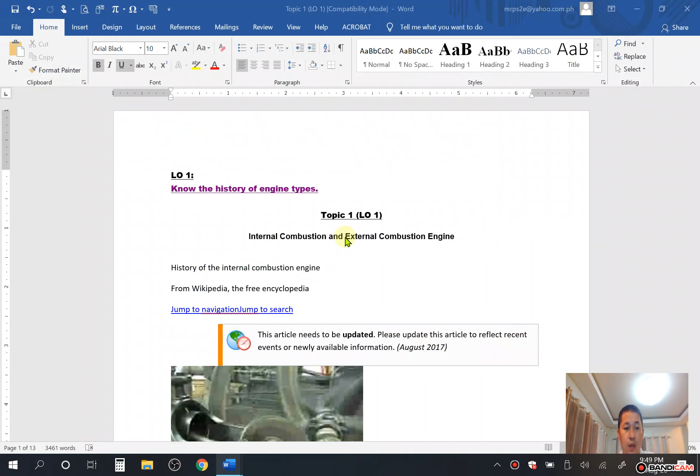So it's not highlighted here. So here I will highlight. So just, so in 1872, it's not showing. So I will click again. So the signal is very weak. It's not opening it. So now it's opening. So it's not highlighted. Okay. So here it's coming. This is pertaining to the history of internal combustion engine.

What happened to this? You are disturbing.

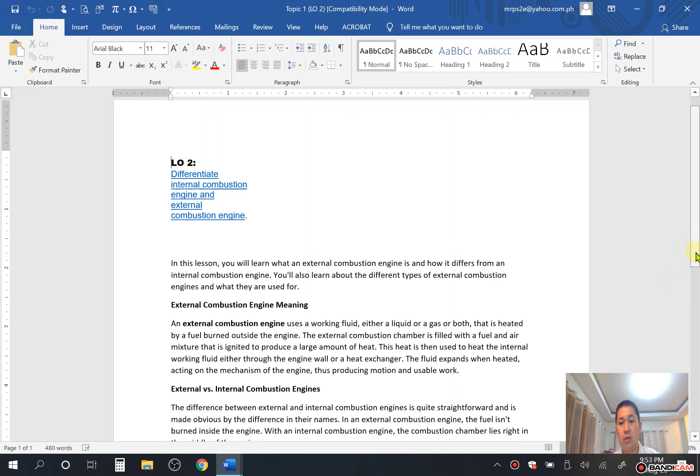So now, let us proceed to learning outcome number 2: differentiate internal combustion engine and external combustion engine. So I will click this link. So here, in this lesson, you will learn what an external combustion engine is and how it differs from the internal combustion engine. You will also learn about the different types of external combustion engines and what they are used for.

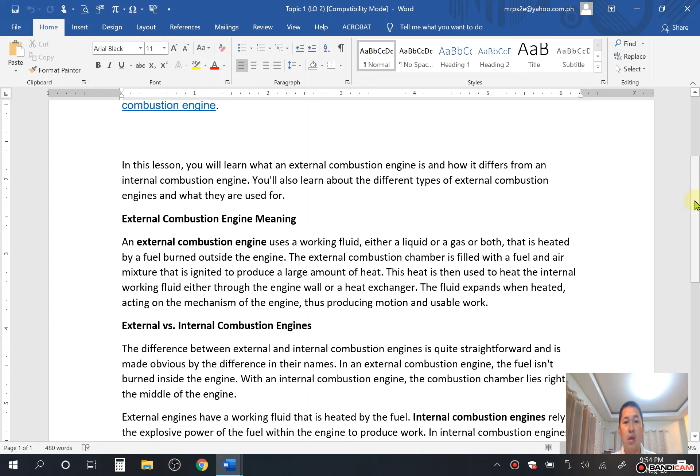The external combustion engine uses a working fluid, either a liquid or gas or both, that is heated by a fuel burned outside the engine. So external means outside. The external combustion chamber is filled with a fuel and air mixture that is ignited to produce a large amount of heat. This heat is then used to heat the internal working fluid, either through the engine wall or a heat exchanger. The fluid expands when heated, acting on the mechanism of the engine, thus producing motion and usable work.

So we will differentiate the two types of engine, which are external and internal. So external versus internal combustion engine. The difference between the external and internal combustion engines is quite straightforward and is made obvious by the difference in their names. So by the names themselves, external and internal, they are already different.

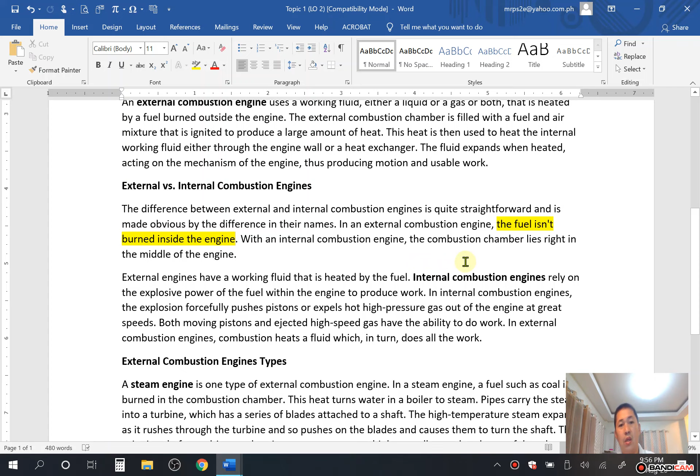So in an external combustion engine, the fuel isn't burned. So this is the keyword. Remember this. So in the external combustion engine, the fuel isn't burned inside the engine itself. With the internal combustion engine, the combustion chamber lies right in the middle of the engine. Later on, we will see an example of the external combustion engine. External engines have a working fluid that is heated by the fuel.

So here it comes. Internal combustion engines rely on the explosive power of the fuel within the engine to produce work. In internal combustion engines, the explosion forcefully pushes the piston or expels high pressure gas out of the engine at great speeds. Both the moving piston and the ejected high speed gas have the ability to do work. In external combustion engines, combustion heats fluids, which in turn do all the work.

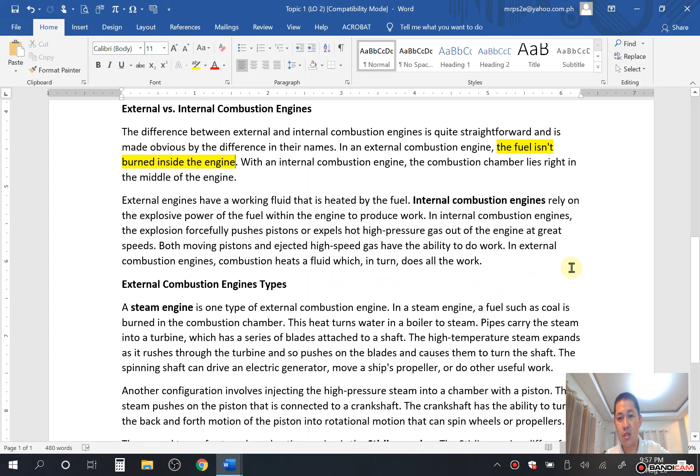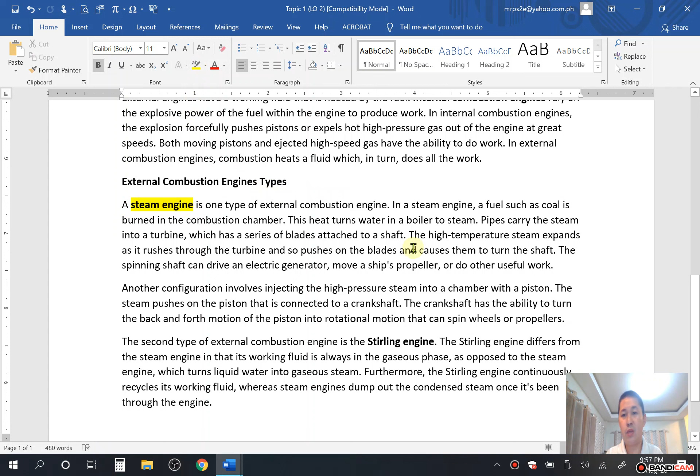So here we will give an example of an external combustion engine. One example is the steam engine. Later on, you can see the picture. So the steam engine is one type of external combustion engine. In a steam engine, a fuel such as coal is burned in the combustion chamber. The heat turns water in a boiler to steam.

So if you remember the movie Titanic, it is a true story. If you remember, the fuel used at that time was coal. So they used coal fuel in the boiler. So nowadays, so I will, excuse me, I will

So nowadays the fuel of the boiler is, so I will check here if there is a pen. So is it this pen? I cannot see where the pen is. So here, review. So here is the pen. So I can write now.

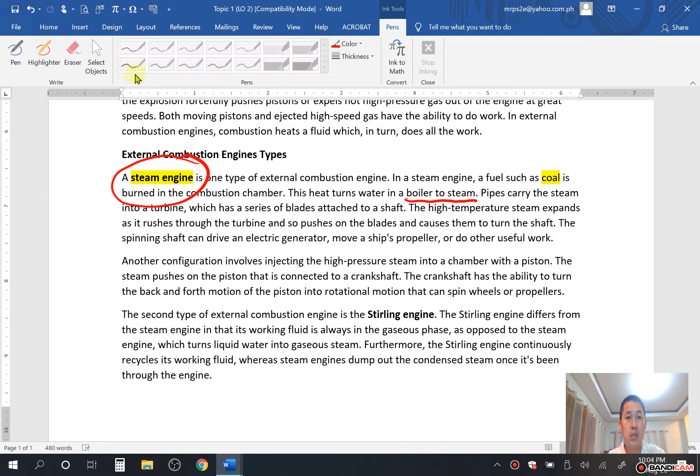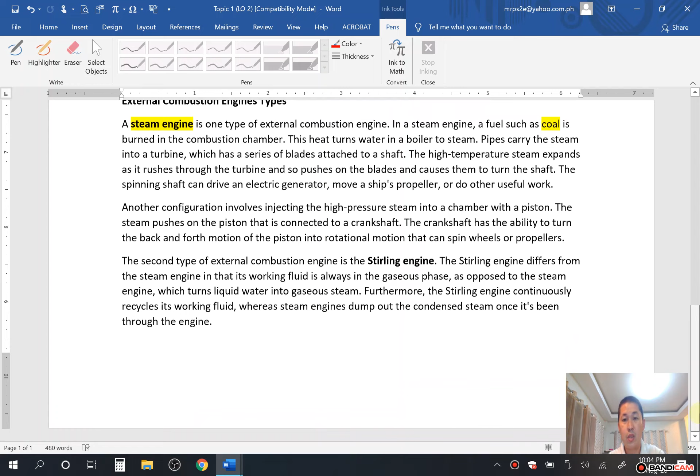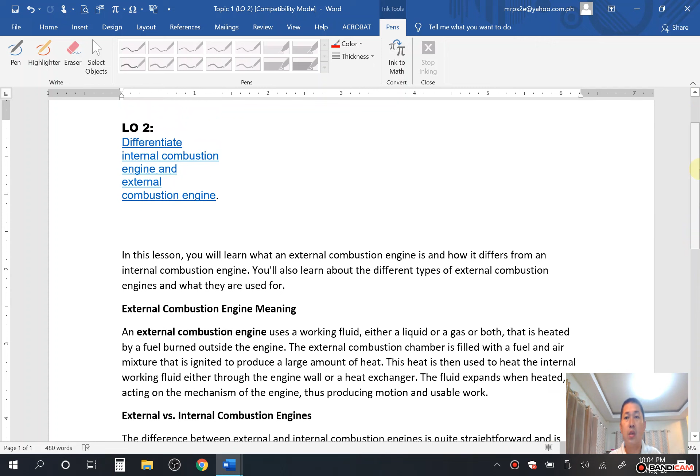So here, later on, we can see the, so I have to erase first. So later we can see the diagram as we go on with our discussion. So I will close this window.

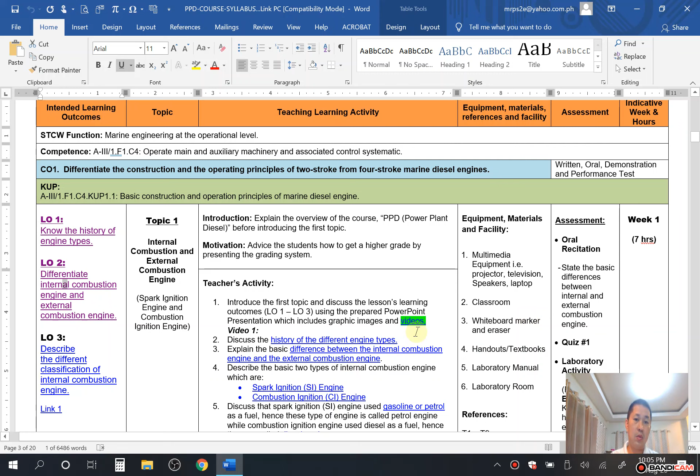So here we already differentiated the internal combustion engine and the external combustion engine. So we will describe the different classifications of internal combustion engine. So I will click this link. So it's not opening. Once again. So it's quite hard to open the link if the signal is not good.

So here we will talk about the classification of engine. So our example here is engine design and classification, how automotive engines are categorized. So this automotive engine is similar to the marine engine in principle, but the difference, for example, is cooling, because in the automotive engine the cooling system is a combination of the coolant, the cooling water, fresh water, and the air, through a radiator.

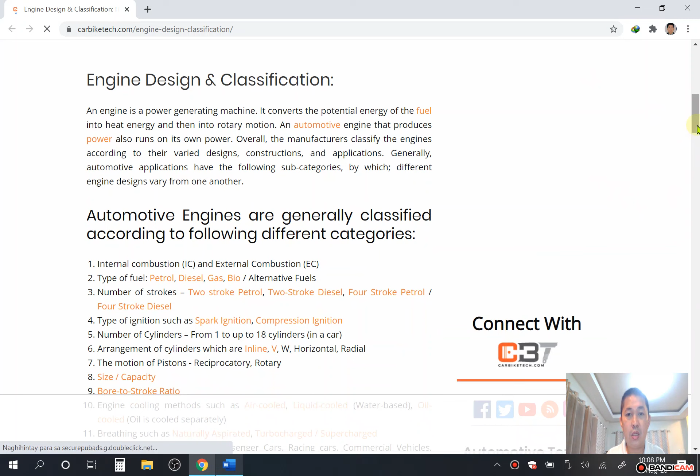But in the ship, there is a freshwater cooler, and the fresh water is being cooled by seawater, and the engine is being cooled by the fresh water. So now, engine design and classification. We can classify the engine generally according to the following categories. Number one, internal combustion, which is IC, and external combustion, which is EC.

Number 2 category, type of fuel. Internal and external combustion engines use petrol or gasoline, diesel fuel, gas fuel, and biofuel. Number 3, number of strokes. Internal combustion engines are classified by number of strokes: 2-stroke petrol engine, 2-stroke diesel engine, 4-stroke petrol engine, and 4-stroke diesel engine. Number 4, type of ignition, such as spark ignition and compression ignition.

They are also classified by the number of cylinders, from 1 up to 18 cylinders, depending on the design. Arrangement of cylinders: inline and V-type, also W type, horizontal type and radial type. The motion of pistons is either rotary or reciprocating. They are also categorized as naturally aspirated, turbocharged, or supercharged. So these are the classifications of engine.

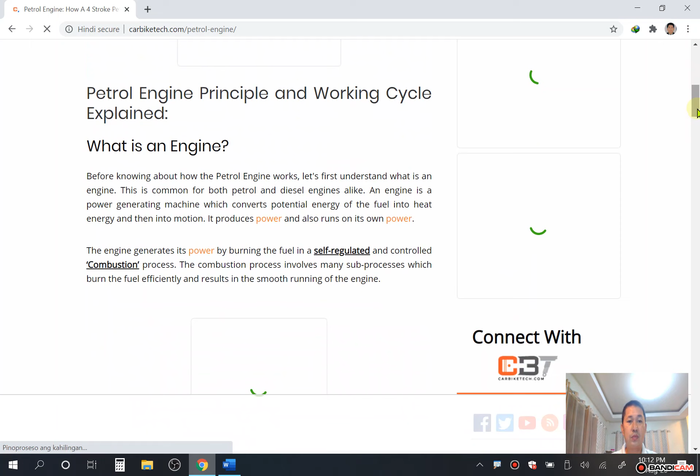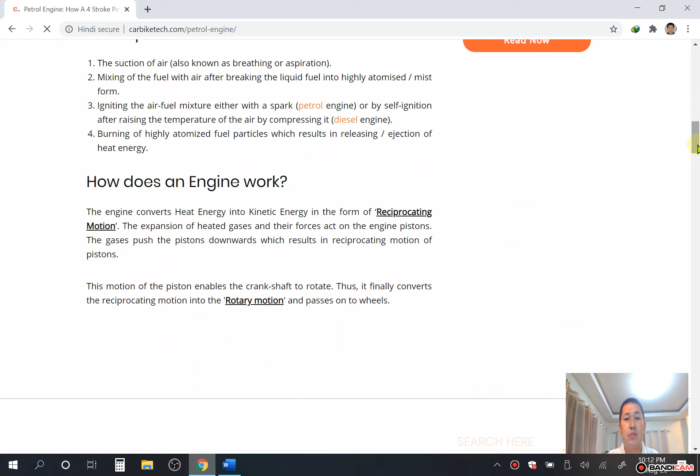So it's not opening it. Or maybe I can open my Word file. So here, it's not linked now. So we have to wait.

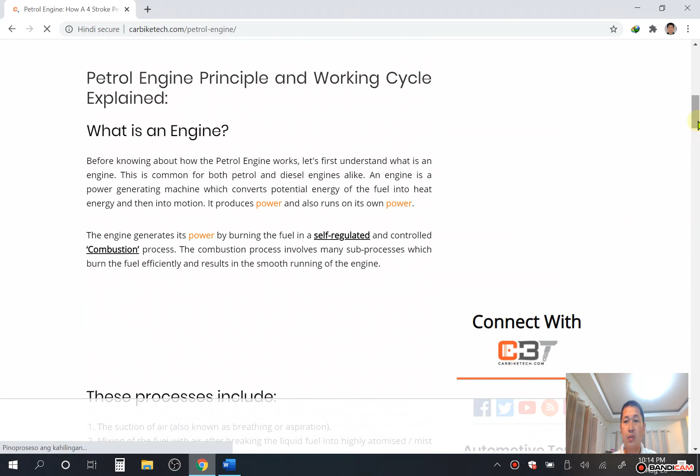So next, the Otto cycle is known as the four-stroke spark ignition cycle. It was named after German engineer Nikolaus Otto, who developed and patented the first four-stroke petrol engine. The four-stroke petrol engine works on the following cycle. Suction stroke with the piston moving downwards. So this is the piston. Piston moving downward.

And the opening of the intake valve or inlet valve. So the correct term is intake valve. So this one now is open. So the valve creates suction of the air-fuel mixture. So in the gasoline engine, when the piston is moving downward, the fuel and air is being sucked here. You see? So it's sucked into the cylinder.

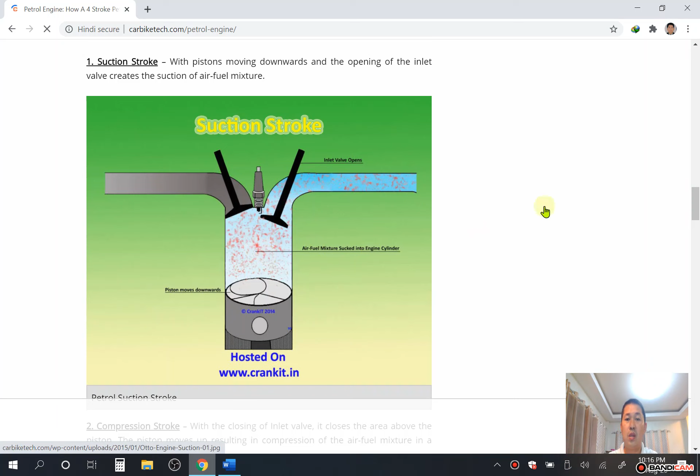So next stroke, compression stroke. So in the compression stroke, with the closing of the inlet valve, it closes the area above and the piston moves up, resulting in the compression of the air-fuel mixture in the confined space. So now you can see the intake valve is closed and the piston is moving upward. So here, this is the piston. So now a compression happens. So that is the compression stroke. So compression of air here together with the fuel mixture, because this is a gasoline engine.

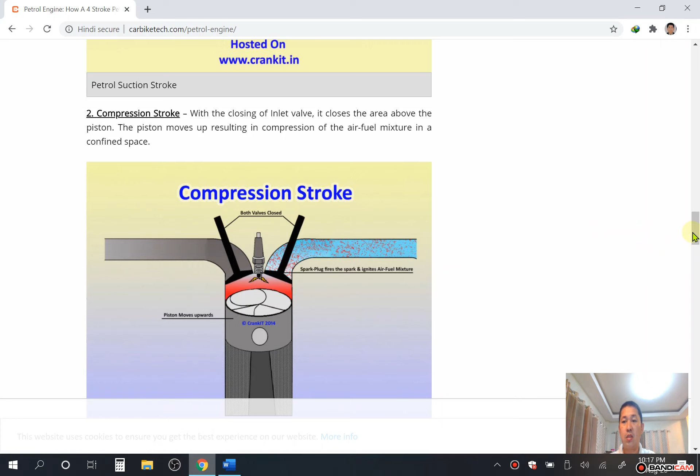So now followed by the spark. So this is a spark from the spark plug. So next stroke. So here there is a process, the combustion process. So at this stage the spark plug fires the sparks, resulting in instantaneous burning of petrol, causing an explosion. This causes heat to release, which generates expanding forces known as power. So here, as you can see on this drawing, there is a spark from the spark plug. So remember the keyword. If the question is SI engine, this belongs to the Otto cycle, which is using a spark plug. So this is a spark plug.

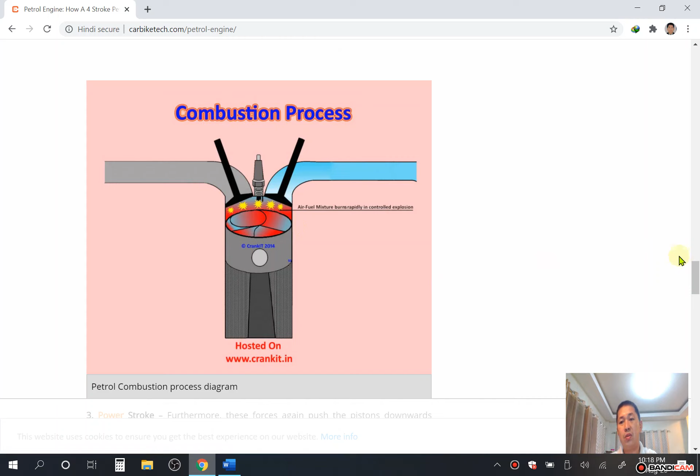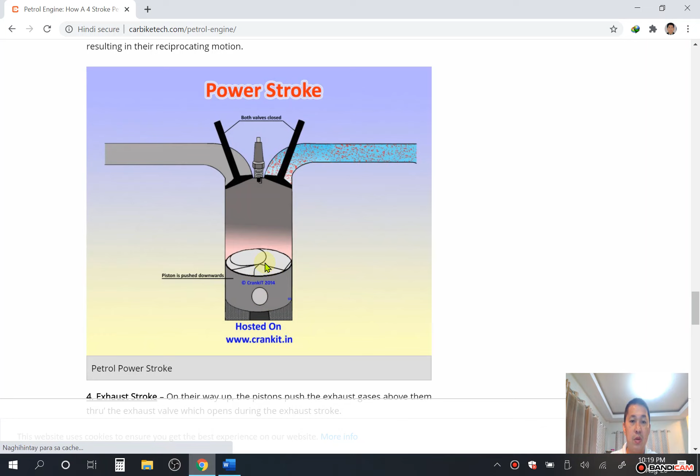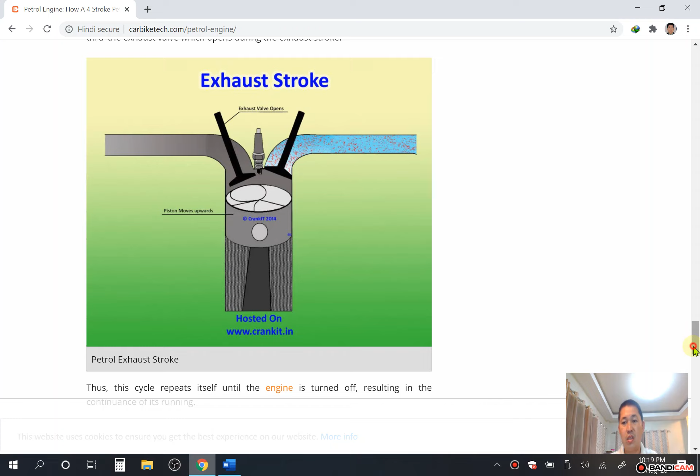Next. So now you can see here the combustion process. So there is a compression of the air and fuel mixture here, then followed by the spark plug. So there is combustion happening inside the cylinder. So now, as you can see, when the combustion happens, there are expanding gases in this area here. So when there is an expansion of gases inside the cylinder, the piston is pushed downward. So the piston is connected to the connecting rod, and the connecting rod is connected to the crankshaft. So the crankshaft cranks and continues turning. So that is the power stroke here.

So now after the power stroke, there is the so-called exhaust stroke. So now the exhaust valve is open. So as you can see here on the drawing, the exhaust valve is open. So the piston moving upward pushes the exhaust gases out, going to the atmosphere. So that is the explanation of the SI engine. So the SI engine, remember, there is a spark plug. The way this engine ignites is by the use of the electric spark from the spark plug. So next,

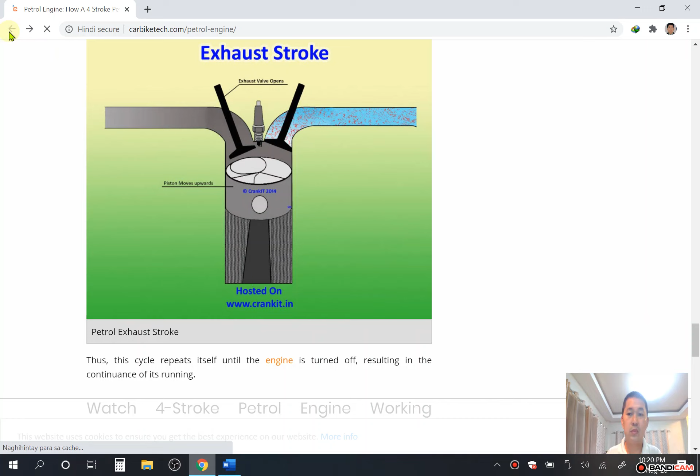So the signal is quite slow. So here we will proceed with the compression ignition engine. So, always loading.

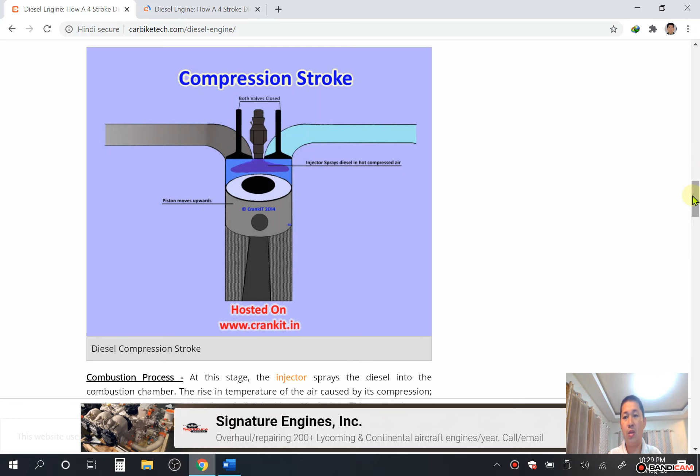So remember, the SI engine uses a spark plug to ignite the air and fuel, and the compression ignition engine, which is the CI engine, ignites the fuel and air inside the cylinder by heat of compression. So that is the difference between these two engines. So here let us go to the combustion process.

Combustion process. At this stage, the injector sprays the diesel into the combustion chamber. The rise in temperature of the air, so heat of compression, caused by its compression results in instantaneous burning of diesel with an explosion. This causes the heat release, which generates expanding forces known as power.

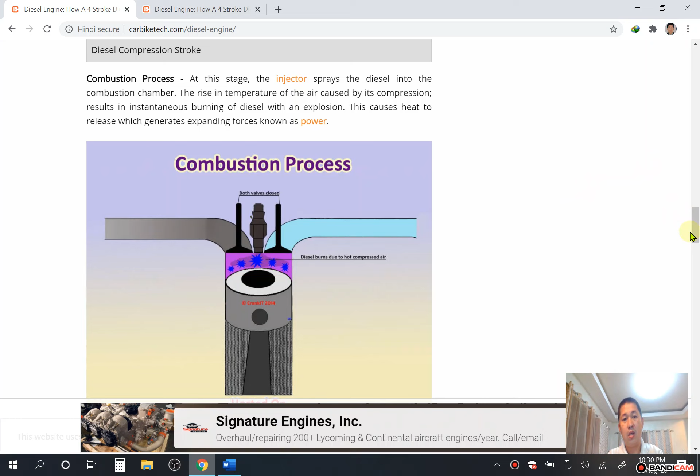So now, as you can see here, there is a spray of fuel, which is this diesel fuel. So this is the injector. So now, after these events, there is what we call the power stroke. So power stroke, this force again pushes the piston downwards, resulting in reciprocating motion. So here you can see the combustion, this is combustion here, see?

So it's not working now. I will activate. Now it's working.

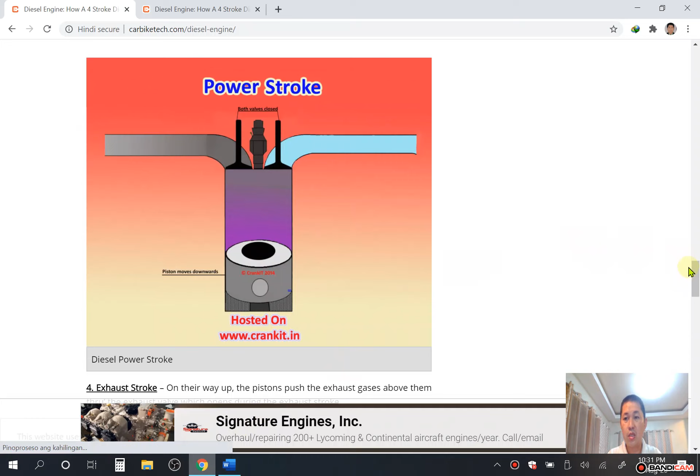So here, this is combustion. So now the expanding gases here, because of the combustion, push the piston downward. So this piston has a connecting rod connected, and it is also connected to the crankshaft. So what happened? Crankshaft. So now you see this here down here. This is the connecting rod connected to the crankshaft.

So it pushes the crankshaft, which will crank and continue turning due to the combustion, or the power stroke of the other cylinder. So just like you are riding a bike, you have to crank the bike to run.

Here another stroke is the exhaust stroke. So exhaust stroke: on their way up, the pistons push the exhaust gases above them to the exhaust valve, which opens during the exhaust stroke. So as you can see here, the exhaust valve opens. So now this is the exhaust valve.

So when the piston moves upward, this piston pushes the exhaust gas out here through the exhaust pipe because the exhaust valve is open. So that is the exhaust stroke.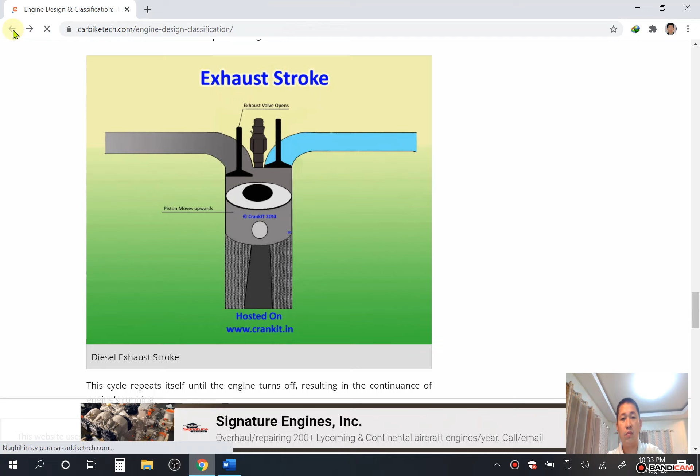The signal is slow. So we already discussed the spark ignition engine and compression ignition engine. Just remember that the spark ignition engine, or the petrol or gasoline engine, uses a spark plug to ignite the fuel, whereas the compression ignition engine, or CI engine, ignites the fuel by means of heat of compression inside the engine cylinder. So remember that.

So another classification of this internal combustion engine: there is also the inline engine.

So it's quite difficult to open the link when the signal is very weak. So now it takes time.

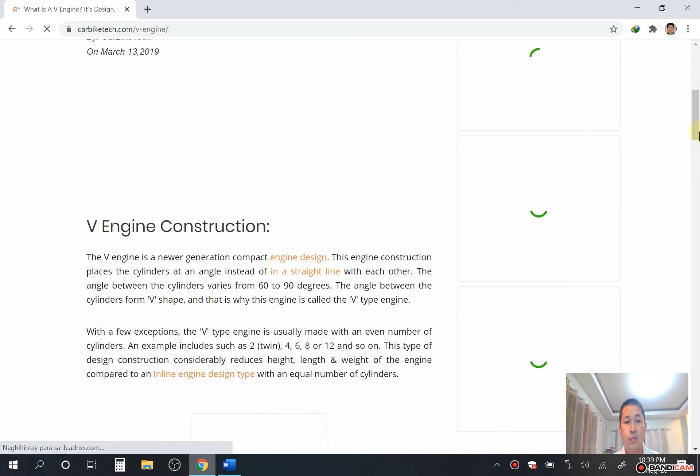So what is V-type engine? Its design, construction, and advantages. So the engine construction places the cylinders at an angle instead of in a straight line with each other. The angle between the cylinders varies from 60 to 90 degrees, so it depends upon the maker. So the angle between the cylinders forms a V shape, and that is why this engine is called V-type engine.

So remember the keyword, the angle between the cylinders forms a V shape. The cylinders form a V shape in a V-type engine. So here, this is a V-type engine. So the cylinders are arranged in a V shape. This one, you see? So either 60 degrees angle or 90 degrees angle. So that is V-type engine.

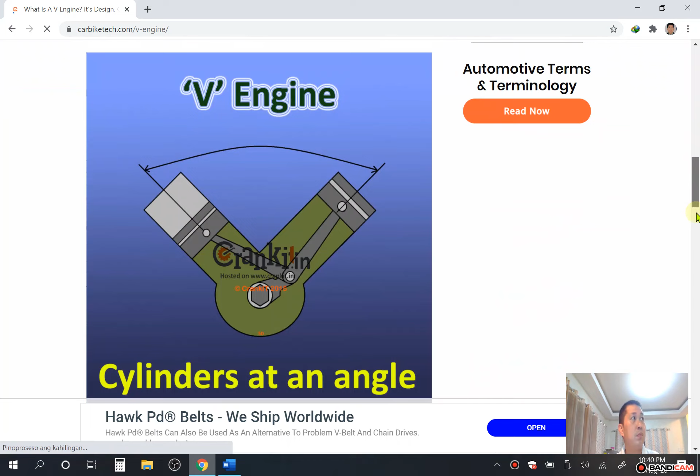So I will continue this recording later. So we'll discuss the gasoline engine, diesel engine, Otto cycle, and diesel cycle later. So I will stop this recording.

So we will continue with our discussion. So here we'll discuss that the spark ignition engine is an engine that uses gasoline or petrol as a fuel. Hence, this type of engine is called petrol engine, while compression ignition engines use diesel as fuel. Hence, they are called diesel engines.

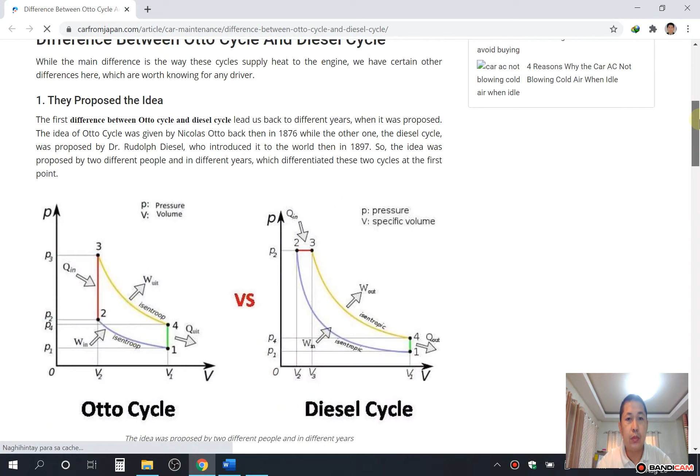So I'll open this link. So it's not opening yet. So this is the problem when we are directly connected to the internet. It depends on the signal. It is not opening right away. So we'll discuss this later. We'll open another window.

So here we have, you see, in our syllabus, gasoline or petrol engine. So what is petrol engine? Petrol engine, this is British English, or gasoline engine, this is American English. So an internal combustion engine with spark ignition designed to run on petrol. So in a petrol engine, there is a spark plug, or this engine is called spark ignition engine. So that is petrol engine.

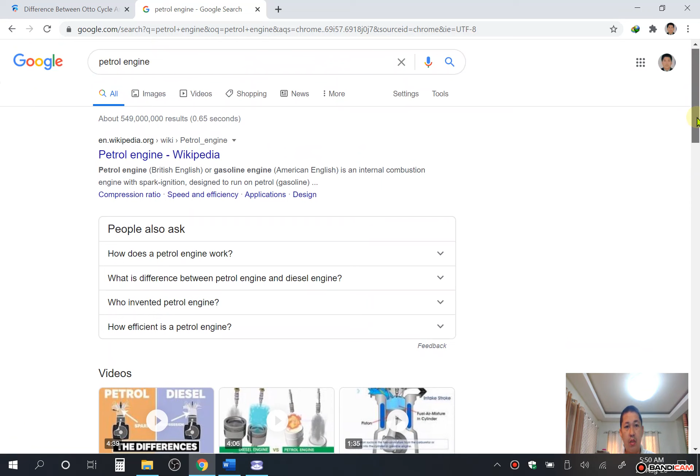So gasoline engine and petrol engine are the same; petrol engine is British English, but gasoline engine is American English. So gasoline engine uses gasoline or petrol. So here another meaning from Encyclopedia Britannica. Gasoline engine, any of a class of internal combustion engines that generate power by burning a volatile liquid fuel, such as gasoline or a gasoline mixture, or what we call petrol. So we'll see this one.

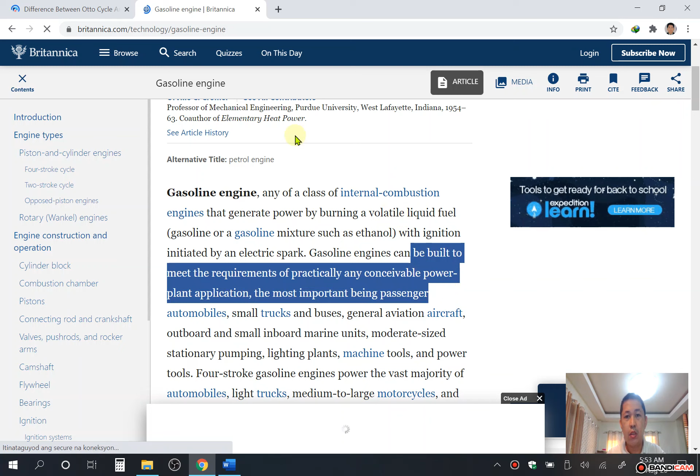Gasoline engine, any of a class of internal combustion engines that generate power by burning a volatile liquid fuel, gasoline or gasoline mixture such as ethanol, with ignition initiated by an electric spark. So remember the keyword electric spark in a gasoline engine or SI engine. So we'll go to the diesel engine.

Quite hard to open this internet.

So here the diesel engine, named after Rudolf Diesel. So this is a German engineer, Rudolf Diesel. So this diesel engine is taken from his name, Rudolf Diesel. So it's an internal combustion engine in which ignition of the fuel is caused by the elevated temperature of the air in the cylinder due to mechanical compression, adiabatic compression. Thus, the diesel engine is a so-called compression ignition engine, or CI engine.

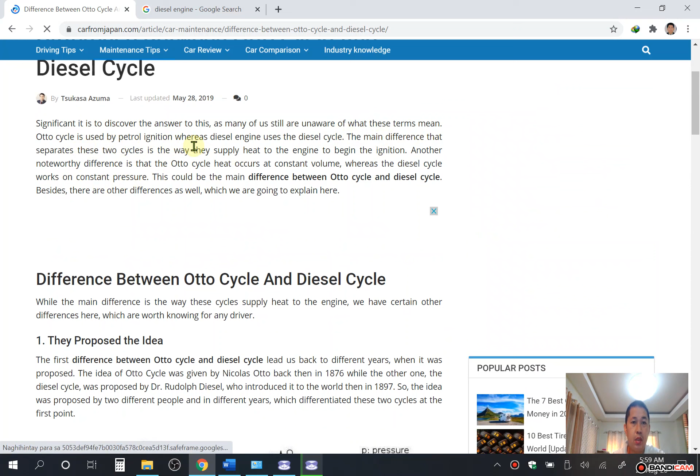So we'll continue. So we'll discuss the difference of Otto cycle and diesel cycle. So here we have the Otto cycle and the diesel cycle. So now the difference between Otto cycle and diesel cycle. It is significant to discover the answer to this, as many of us are still unaware of what these terms mean. So the Otto cycle is used by petrol engines, whereas the diesel engine uses the diesel cycle.

The main difference that separates these two cycles is the way they supply heat to the engine to begin ignition. So another noteworthy difference is that in the Otto cycle heat addition occurs at constant volume, whereas the diesel cycle works at constant pressure. This could be the main difference between Otto cycle and diesel cycle. Besides, there are other differences as well, which we are going to explain here.

So now, the difference between Otto cycle and diesel cycle. The main difference is the way the cycle supplies heat to the engine, but we can have certain other differences here which are worth knowing for us.

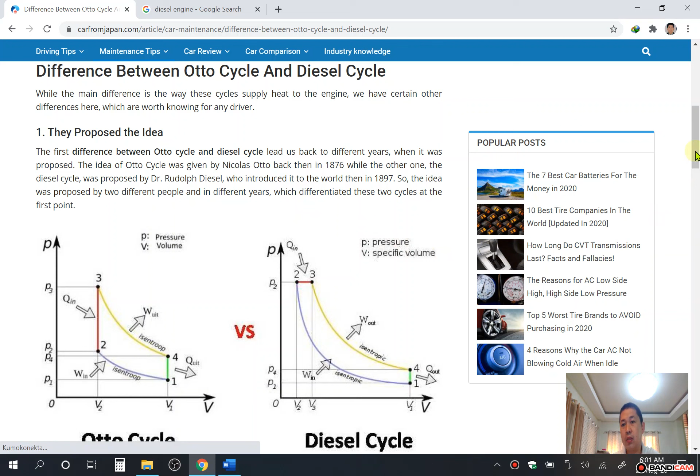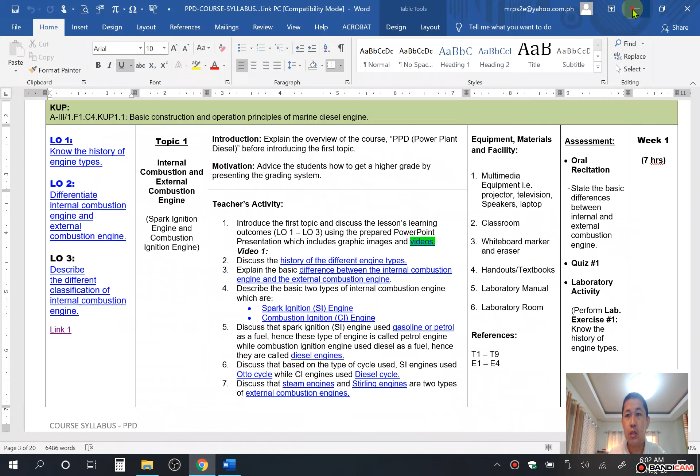So now we have here the PV diagram, the pressure volume diagram. First we have to discuss the Otto cycle. So here the Otto cycle, let me open this up. So here we start first with the Otto cycle.

So here from P1 to V1, P1 and V1. When we apply this to the engine, this is intake, so intake stroke. From here to there is intake stroke, and from P1 to P2, so here is P2 for pressure 2, and V1 to V2, this area is V2, and this one is V1. So from 1 to 2, the stroke here is compression.

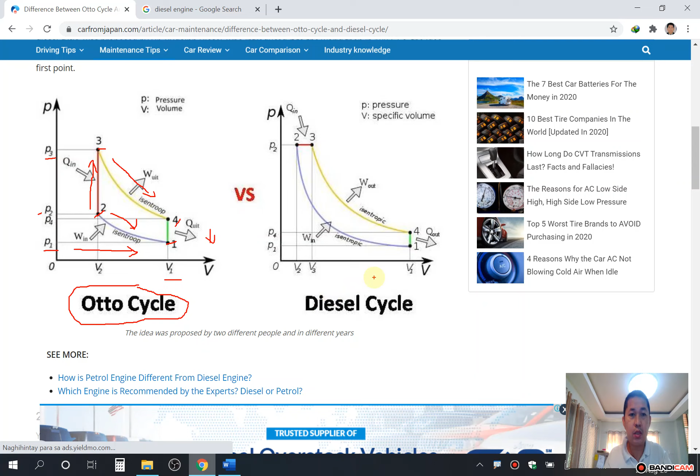Now later on, after discussing the strokes of this engine, we will differentiate the Otto cycle and diesel cycle. So now here is the diesel cycle.

In the diesel cycle, as you can see on the PV diagram, they are already different. So here this is P1 and this is V1. P1 starts here, V1. So now here is also intake stroke - in the diesel cycle engine, this one also is intake stroke. So from P1 to V1 is intake stroke. So here is compression stroke. You can see the red line, ignition. So here is ignition.

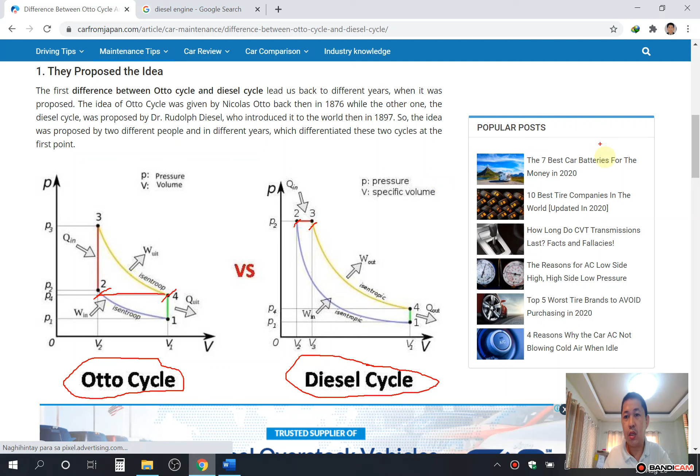So this is additional information. We already know the difference between the Otto cycle and diesel cycle. For more information, you have to follow this link. Just follow this link for information.

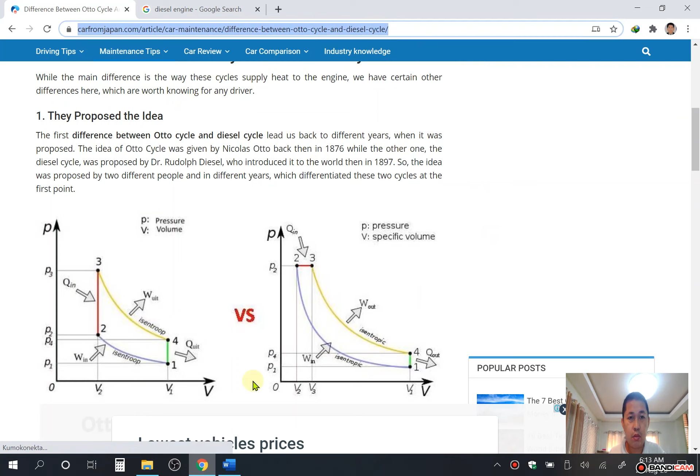Now, let us proceed to the steam engine and Stirling engine. These are two types of external combustion engine. First, we will open the link for external combustion engine.

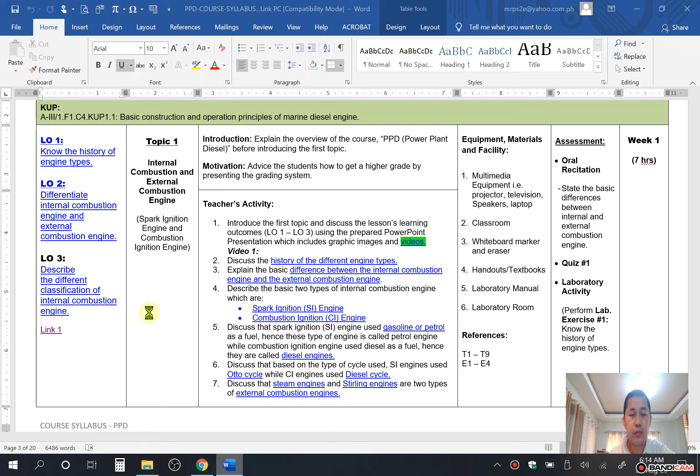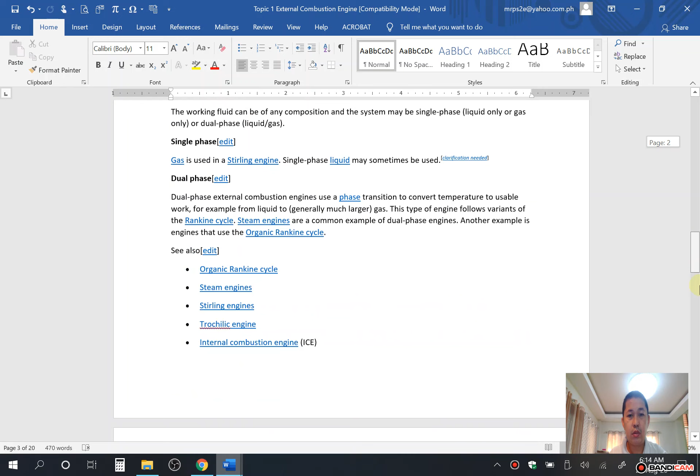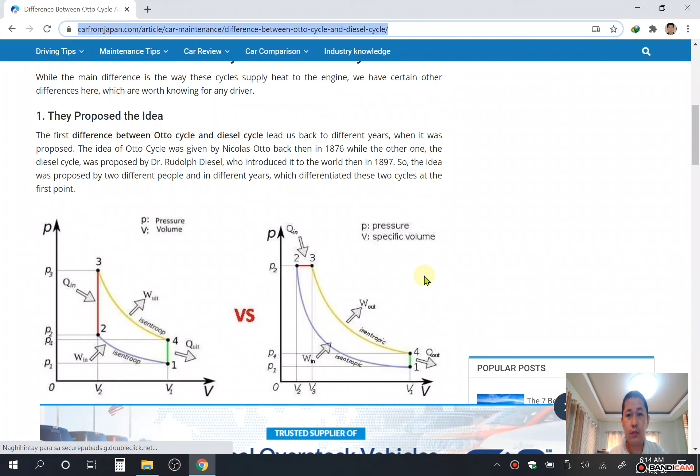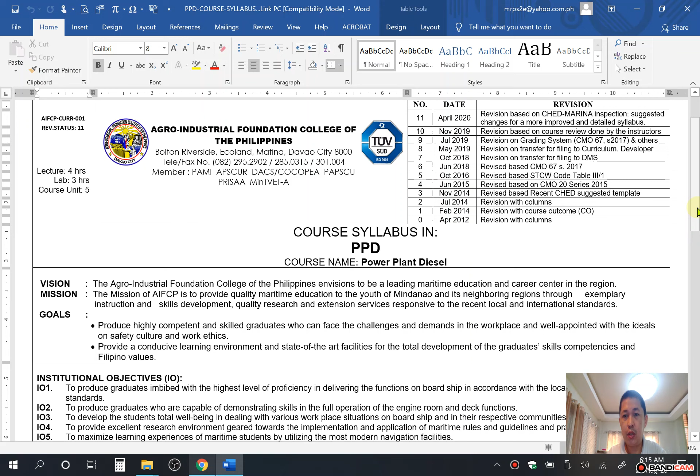My computer is now lagging. This is the old invention. I will search another window. What happened to my computer? It's not responding. I'll open it again. Just be patient, my computer is lagging now. Probably there is malware again. I already scanned this computer, but it's still lagging.

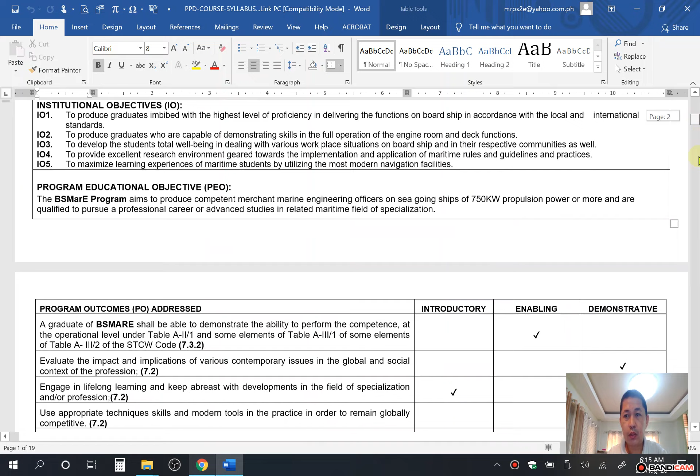External combustion engine. So external combustion engine, or ECE, is a heat engine where a working fluid contained internally is heated by combustion in an external source, through the engine wall or heat exchanger. The fluid then, by expanding and acting on the mechanism of the engine, produces motion and usable work.

In other words, in an external combustion engine, the fuel is not burned inside the engine. It is burned outside the engine, in what is called the boiler. So if the engine is external, it requires a boiler to produce steam, to convert water into steam, and the steam is used to drive the impeller of the engine.

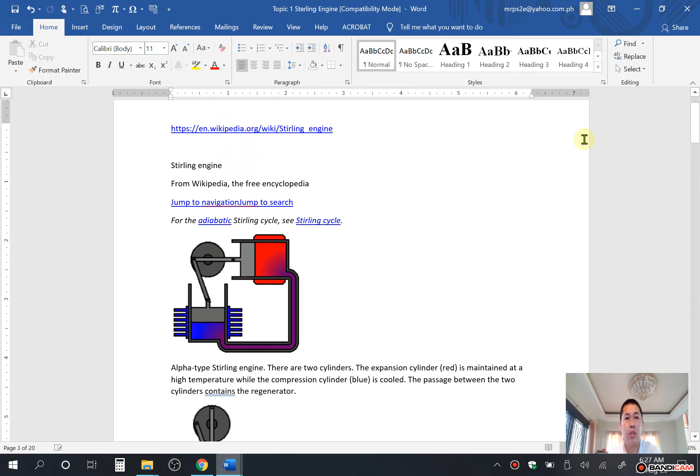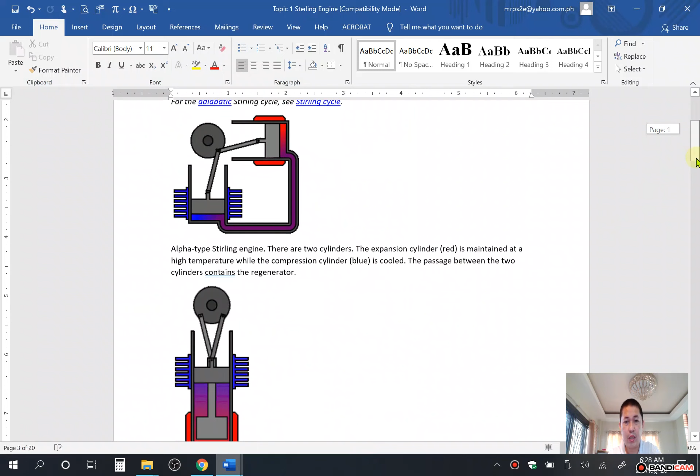First we will define what a Stirling engine is. The Stirling engine is a heat engine that is operated by cyclic compression and expansion of air or other gas as a working fluid, at different temperatures, resulting in a net conversion of heat energy to mechanical work.

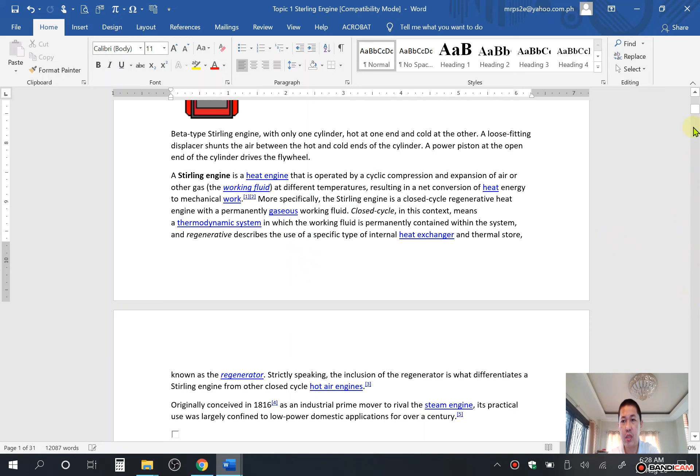So this is the Stirling engine. In this principle, see, the definition says that this engine works by the principle of different temperature, by way of cyclic compression and expansion.

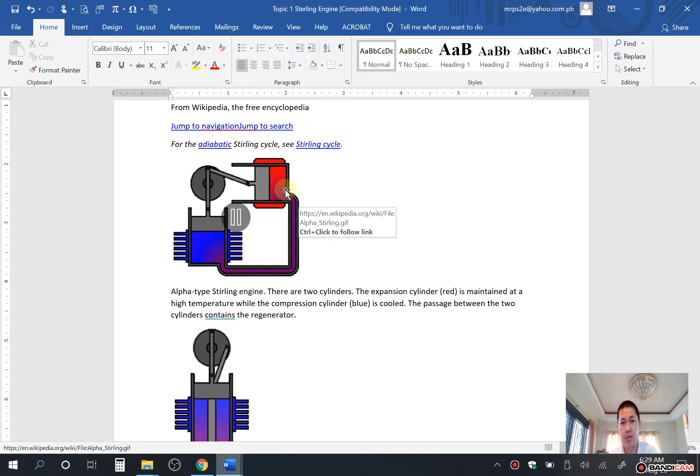You see, this blue color here is cold, and here the red color is hot. The gas is hot, so if the gas is hot, there is an increase of pressure. This increase of pressure pushes the piston forward. And here also is cold gas. So between these two pistons, there is what we call contraction happening.

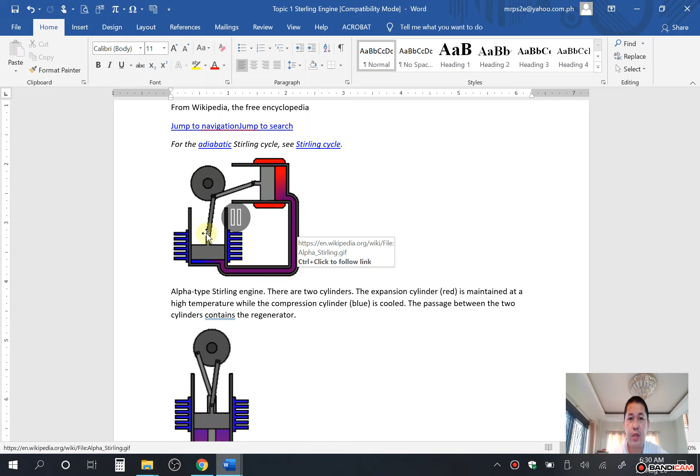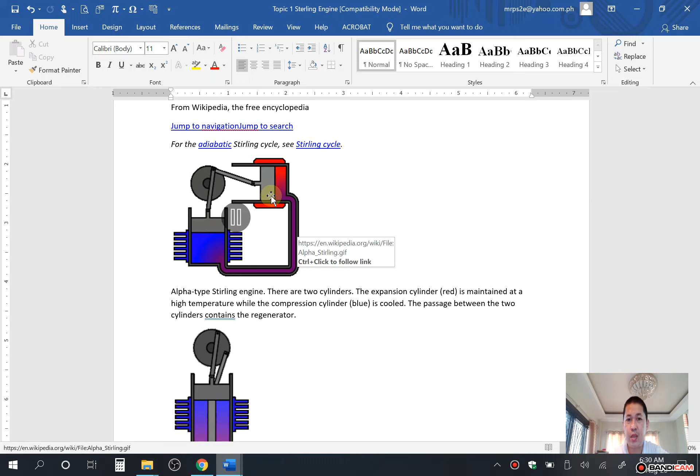When the piston moves towards here, the piston rod moves and turns this crankshaft, and since there is a contraction of different gases here between cold and hot, this also pushes back the piston here, pushing forward and continuing to turn the crankshaft. So between these two temperatures of the different gases, it rotates the crankshaft by the cyclic process called compression and expansion.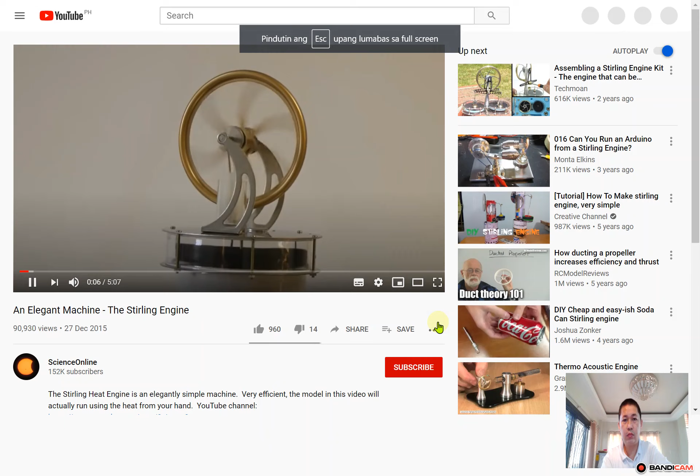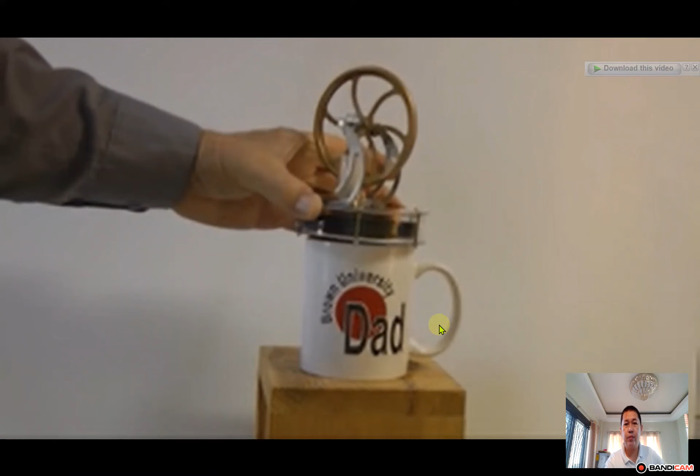So this is hot water, and you see how the Stirling engine works. I recently acquired this little machine. Its motion is intriguing. Apparently it is deriving energy from a cup of hot water.

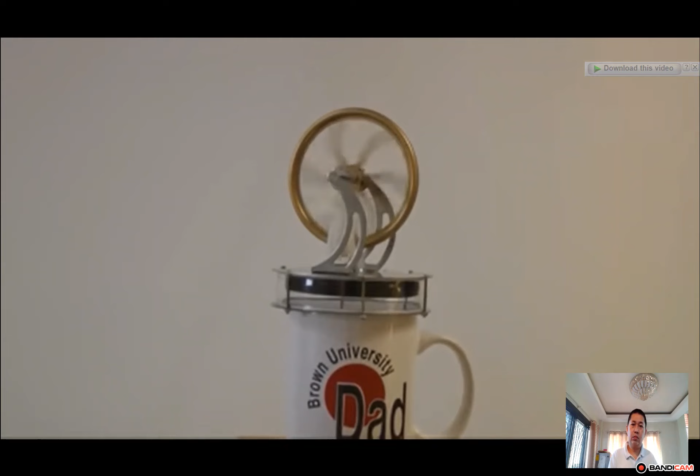This is a Stirling heat engine. Like an internal combustion engine, this machine does have a piston, cylinder, and crankshaft, and it relies on gas pressure to create motion. But unlike a combustion engine, there is no explosion, no intake or exhaust valves. In fact, the gas involved, which is air, is sealed inside the machine and stays there. Somehow this reservoir of air is used to cycle energy, creating mechanical motion.

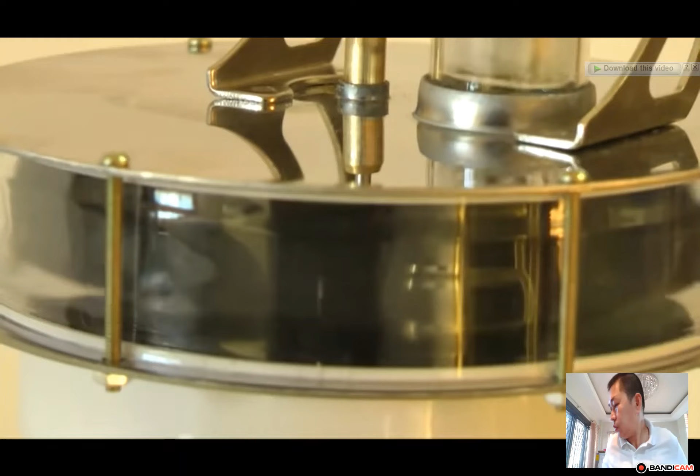The energy being cycled here is heat energy. Exploiting heat energy requires a temperature differential, that is, hot and cold areas in the machine. In this engine, this bottom metal plate is hot, while the upper metal plate is cool. Note that the cylinder joining the metal plates is plastic, a material that provides some thermal insulation between the plates.

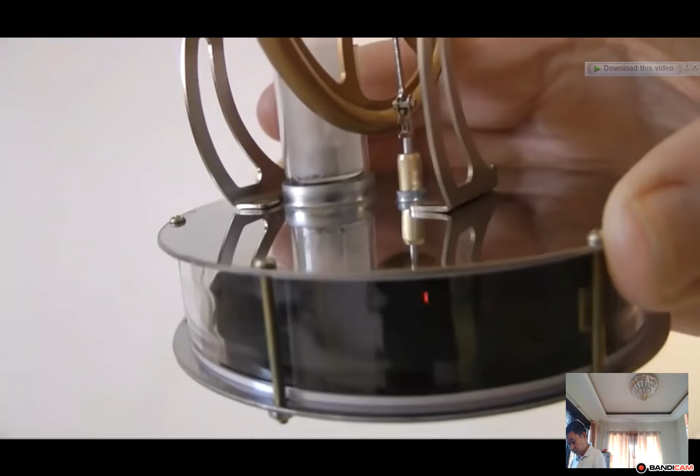Inside this cylinder is a large loose-fitting piston. Interestingly, this piston does not drive the machine. Named the displacer, it plays a role in heat transfer. We'll return to it in a minute.

This small cylinder with a tight-fitting piston is the power cylinder. It is the mechanism producing the force to move the machine. Here's how this works: the bottom metal plate is hot, the upper plate is cool.

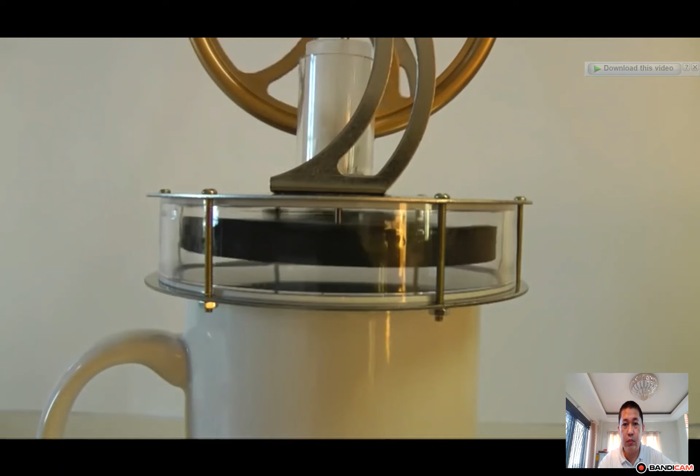I've rotated the flywheel so that the displacer is at the top. This means the large volume of air below the displacer is exposed to the hot plate. This gas is picking up energy and expanding. The resulting increase in pressure exerts force throughout the closed system, including on the power piston. This force pushes the piston up, turning the crank and rotating the flywheel.

The displacer is also connected to the flywheel by a crank. This crank now lowers the displacer, exposing the air to the upper cold plate. So remember, there is a contrast of different temperature here - this is hot and this is cold. That's why the pressure pulls the piston upward, and the cold gas contracts and opposes here, so this also pushes back. So the piston moves in reciprocating motion continuously.

It loses energy, its pressure drops, and the momentum of the rotating flywheel moves the power piston back to the bottom and moves the displacer up, once again exposing the air to the hot plate. The air expands and the increasing pressure starts the power piston on another power stroke. The flywheel plays an important role: its momentum maintains motion when the gas is contracting, cycling the machine into the next power stroke. This cycle repeats as long as there is a temperature differential between the upper and lower plates.

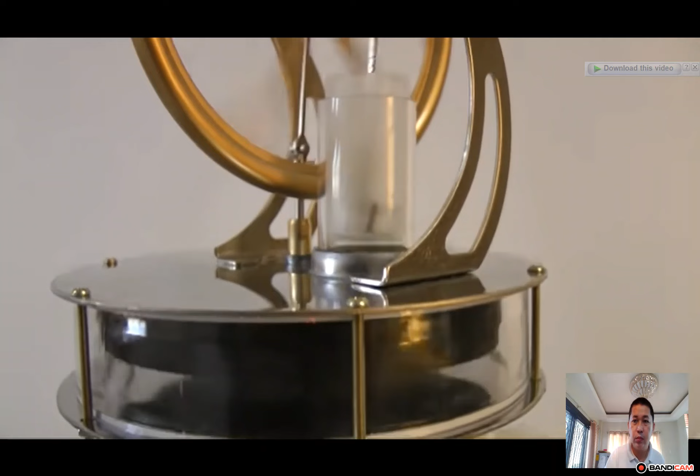Apparently, the difference in temperature between your hand and the ambient air can be enough of a differential. I was unable to get the machine to start using the temperature of my hand, but once started with another heat source, the heat from my hand was enough to sustain motion for a few minutes, particularly if I moved outside. The air temperature is -7 degrees Celsius here this morning, significantly lower than the temperature of my hand.

The invention of the Stirling heat engine is attributed to 19th century Scottish inventor Robert Stirling. The science behind this machine can be attributed to the genius of earlier researchers, people like 17th century scientist Robert Boyle and Blaise Pascal. Like so many other inventions, this elegant little machine represents the creative potential and genius of humankind.

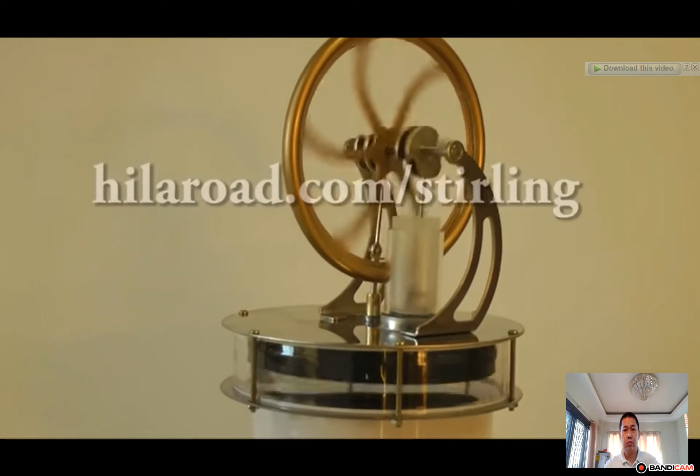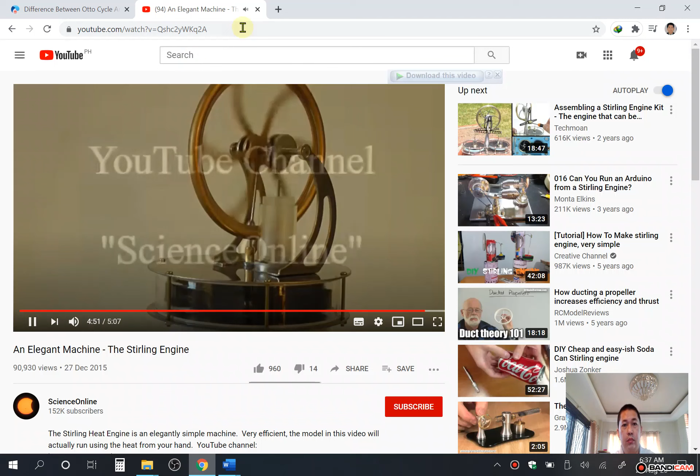So this is the explanation of the Stirling engine.

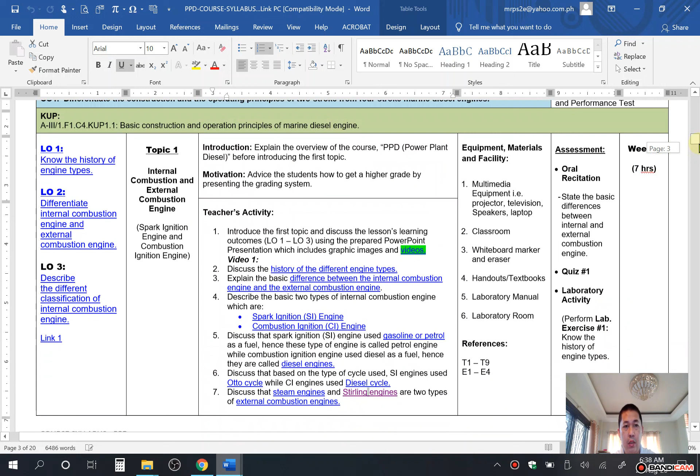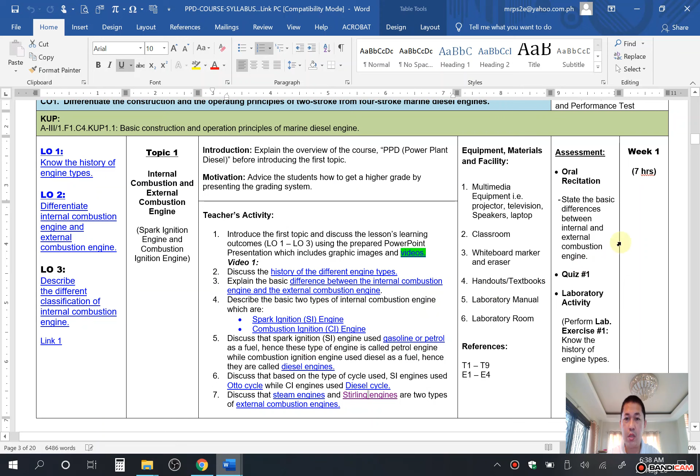So as a recap, we already discussed the history of engine types of the internal combustion engine. We already discussed the difference between internal combustion engine and external combustion engine, as well as the different classification of internal combustion engine, how they are classified. We already discussed the spark ignition engine, which is petrol or gasoline engine, and the compression ignition engine, CI engine, which is diesel. One example is the diesel engine. We already discussed what is gasoline or petrol engine and what is diesel engine, as well as the Otto cycle and the diesel cycle. We already discussed steam engines and Stirling engines, which are the two types of external combustion engine.